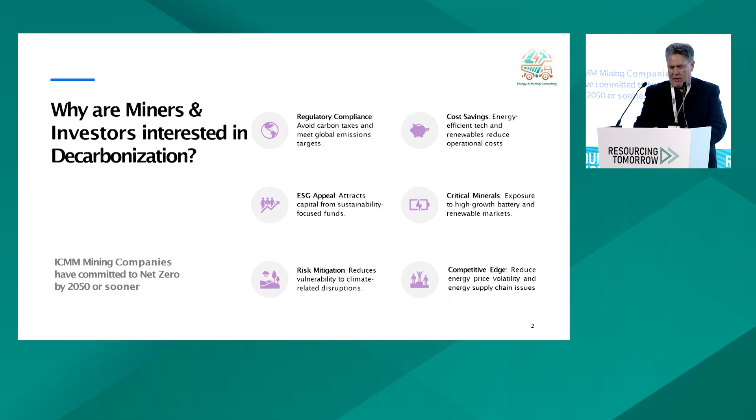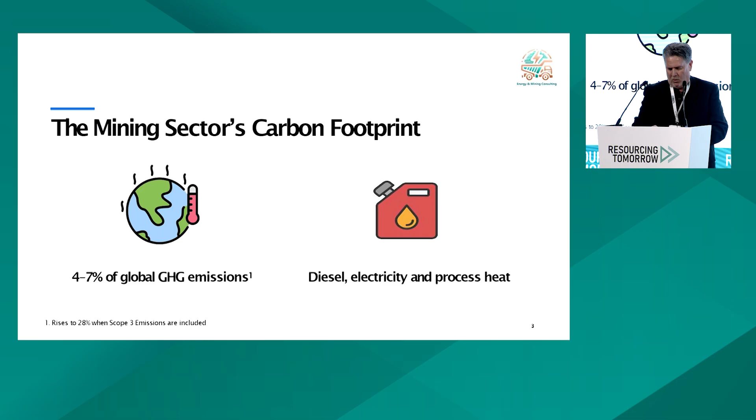So let's start and take a look at the mining industry. The mining industry represents about 4 to 7% of the global footprint. And if you look at what makes up that global footprint, it really comes down to 3 things: diesel, electricity, and process heat. And that's much the same kind of relationship when it comes to the energy aspect, not just the climate change or the carbon aspect.

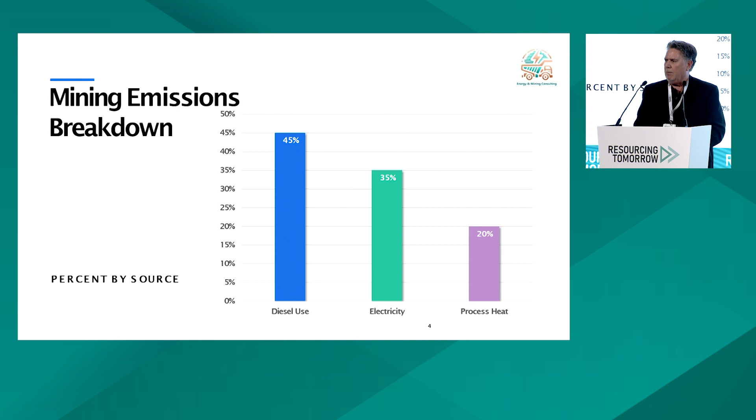So a little bit of a breakdown. I think most people in mining would expect to see that diesel's right up there at 45%, and then power about 35%. But I think a lot of people would be surprised about process heat. It's something we often don't think about, but if you take a mine that has a lime kiln or a calcination process, or has roasters, or has dryers, or produces steam, those are all part of that process heat. And that's probably one of the most difficult things to decarbonize as you go through the process of getting to net zero.

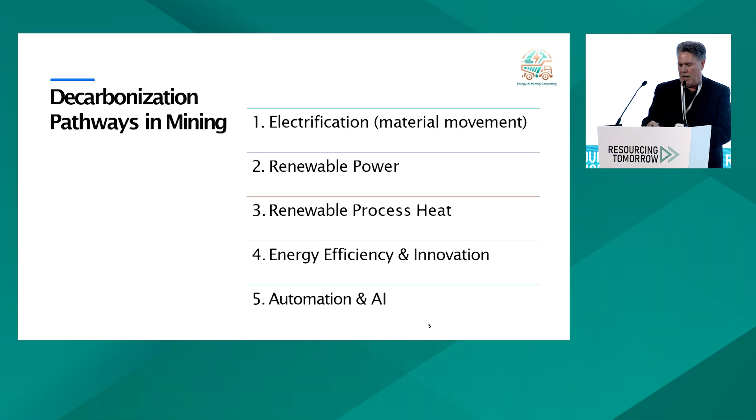I'm going to talk about different pathways. Now, obviously, this isn't an exhaustive list, but these are some of the main areas we can work on in terms of decarbonization. Electrification is a big thing. When I say electrification, I'm really talking about material movement. Renewable power, I think most of us expect that in mines. What we don't often see is renewable process heat, and I'll be talking about that today. And then things like energy efficiency and innovation, and finally automation and AI. You have to talk about AI today.

The metric that's important when you're talking about material movement, the way to compare apples to apples, is called the energy intensity, and that's measured in kilowatt hours per ton kilometer. That means how much energy it takes to move 1 ton of material or waste 1 kilometer. Obviously, the higher that number is, the less efficient that process is at moving materials.

So as I said, traditional diesel haul trucks are almost 0.5 kilowatt hours per ton kilometer. If you go with diesel electric, they're a little bit more efficient because of powertrain efficiencies, regeneration, the engine running in its sweet spot. Things like that give you better efficiencies. And then you get into the electrical technologies, things like electric rail, like Railveyor, or conveyors, and they tend to be more efficient.

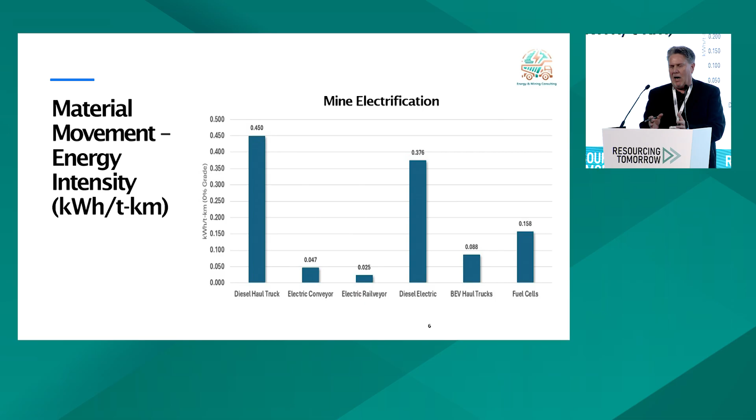First of all, electrical motors are more efficient than diesel engines. And a lot of times, they're not moving as much mass as you have with the haul truck. If you've been around haul trucks, you know the large size they are, the size of their tires, they're carrying their motive power. And you might remember from physics, when you have that kind of mass, that all plays into how much energy it takes to move.

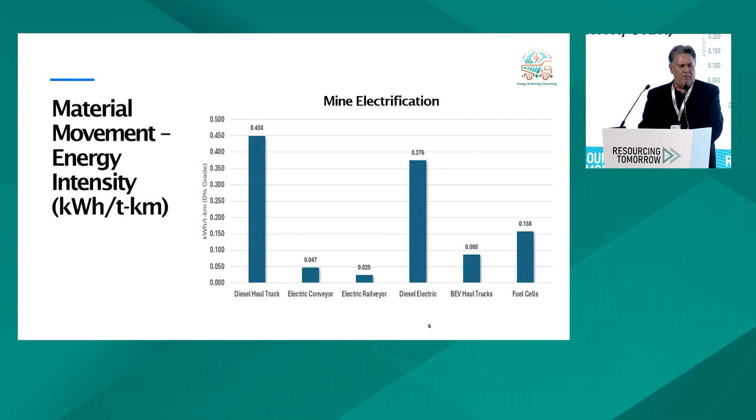From the energy intensity, you can also calculate the carbon intensity of those different material movements, whether it's diesel electric or Railveyor or conveyors. And again, our diesel haul trucks have the highest carbon intensity factor as well. And as you move into electric, you'll see those numbers start to drop off.

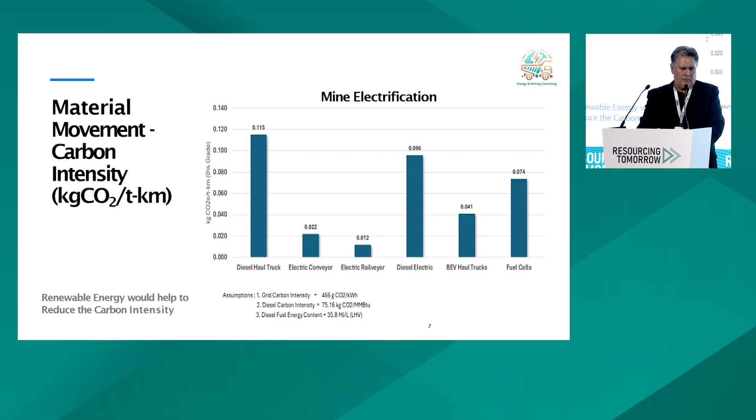I'm working with a company that is called 247. They have an interesting system. They have a hybrid system that is PV plus CSP plus storage, and that would provide basically 100% renewable. And they have the ability to provide backup using fossil fuels if needed for maybe that 10–15% of the time when you've had no sunshine for a while, or it's been rainy or whatever.

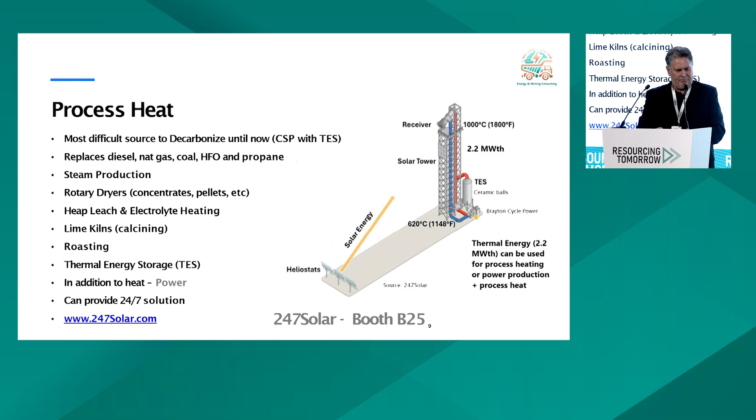What's interesting also is when you have low-cost heat available, you can do some interesting things. In a lot of mining processes, especially with lower grade ores, you get into things like heap leach. And one of the things you can do is heap leach heating. By doing so, you improve the process kinetics. You also reduce the surface tension and the viscosity of the solution. That means you get the solutions into more nooks and crannies, so to speak, and you're able to liberate more metals that way.

In the past, you only really saw heap leach heating in really cold climates. But if heat is very inexpensive, that changes. Most of these places are fairly remote, and if they wanted to do heap leach heating, they would have to use things like diesel boilers. So now you have the diesel cost to deal with, and you have the carbon footprint. But if you can use this heat to do heap leach heating, you can greatly improve the recovery of your metals. The same thing can be said for electrolyte heating.

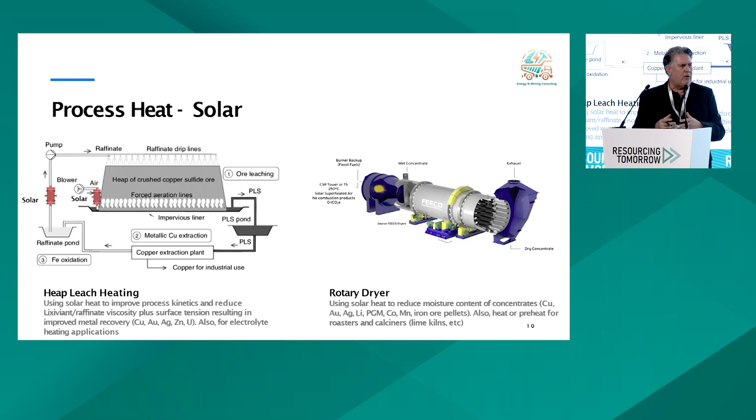I mentioned in one of the first slides that electricity is one of our big energy users, as well as one of our big carbon emitters. And really, when you look at mining, comminution, basically crushing and grinding, is usually your biggest electrical load. The unfortunate thing in mining is comminution is probably one of the least efficient industrial processes out there. Anywhere between 5 and maybe 15% at the most in terms of efficiency. And so you ask, well, where does the rest go? Well, if you look at mills, they're really big heaters and big noisemakers. That's really where most of the energy ends up, not doing useful work.

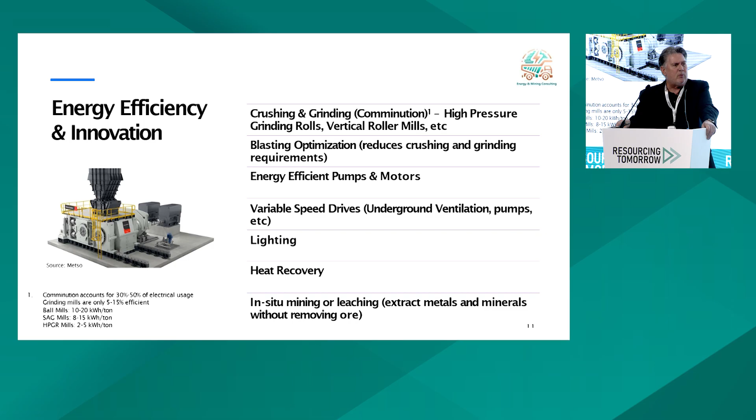So that's really important. We're seeing new technologies coming out, like high-pressure grinding rolls and vertical roller mills, that are much more efficient than traditional SAG or ball mills. In addition to crushing and grinding, we also have things like better blast optimization and traditional energy management strategies, like variable speed drives, lighting, heat recovery, and so forth.

In addition to what we talked about, we're also seeing a lot more efforts on digitization and AI. One of the big ones is ore sorting. Instead of processing all the material, really process what makes economical sense. To put that in perspective, it depends on what sensors you're using, and it depends on what type of ore it is, but a good rule of thumb is with sorting, you probably get 65% of valuable material and about 35% waste.

And finally, simulations and automation. This is also very important to simulate your fleet management process, to really look for optimization. And in the previous discussion, people talked about automation, like removing the person from the control of the vehicle and really doing that through automation to improve efficiencies and reduce energy and maintenance costs.

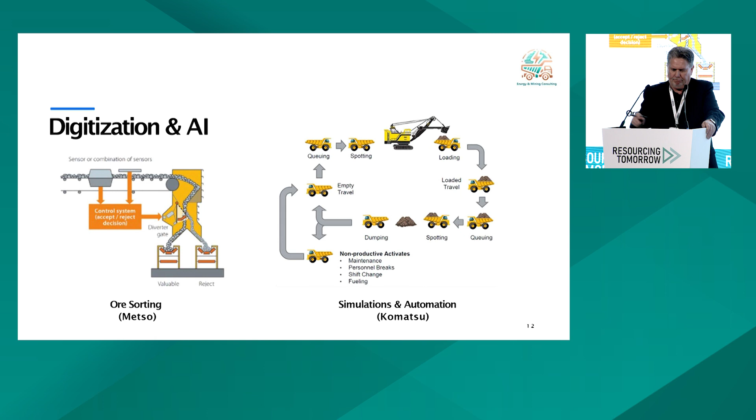That's it for today. What I would like to leave you with, though, is most times when we talk about decarbonization, we really think about climate change and those environmental aspects. Those things are very important, but I think it's also important to understand there's a financial and risk management aspect of it. As you saw from some of these slides, we can drastically reduce our energy cost, and energy could represent 30% of your operating costs. So that can make a huge difference in your bottom line.

And if you're not having to bring diesel to the site, you're not having to worry about what's the cost of diesel in the future. You're not having to worry about theft. No one likes to talk about it in mining, but there's a lot of theft of diesel. You also don't have to worry about some of the environmental aspects. If you're trucking diesel to the site, what happens if you have a diesel spill? So a lot of the things that I talked about have those aspects as well, from a risk management perspective and also as a way to reduce operating costs and improve the bottom line at your mine site. So that's why it's important to both miners and investors alike.